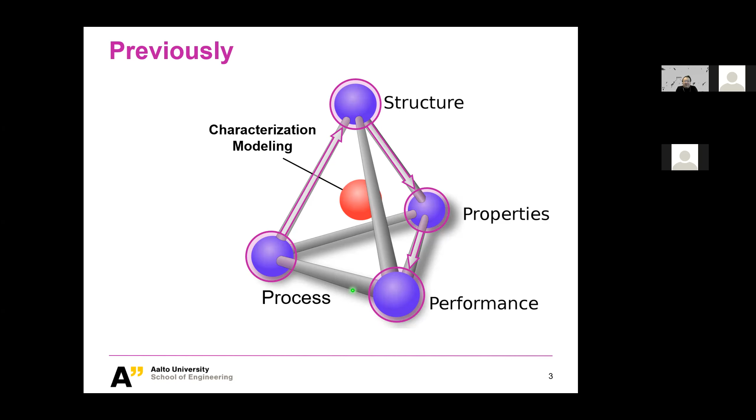But we also want to do something. After we know why, we want to produce things that behave the way we want, right? So that is the process. So process is the key actually for material engineering. And basically, this is the functionality part about material science engineering.

Before we go to processes in detail, we are not really touching the core or the technologies about processes this week, but we need to prepare you. We're going to prepare you in three topics. The first one is about diffusion, the second one is about phase diagram, and the last one is about phase transformation. Before we dive into diffusion, I would like to give you a reason why we're doing this.

Let me see if we got, all right, cool. We got most of the guys here, awesome.

Anyway, let me ask you: if we want to produce something, so we said the process in the end is about producing something. If you think about the engineering materials in our daily life, not a wooden chair or a wooden desk, these are natural materials, let's say we consider engineering materials in terms of metals. Imagine your kitchenware, for example, a knife.

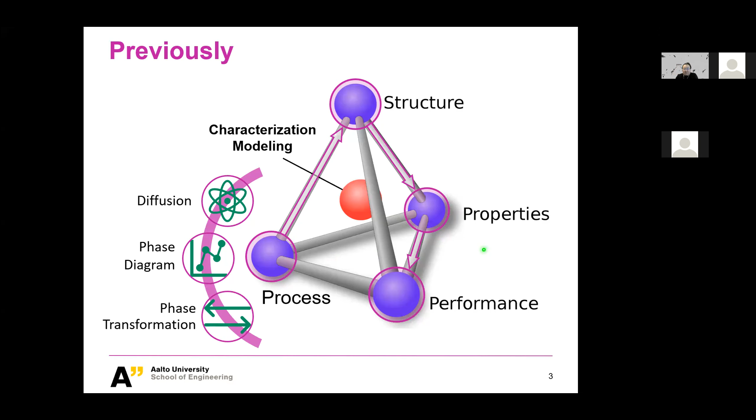So that is the reason we need to learn all these three items, diffusion, phase diagram, and phase transformation, because there is already a phase transformation if we speak about just liquid and solid. But the phase transformation we're speaking about in today's lecture is much more complicated than just from liquid to solid. All right, I think that gives you an idea what we're doing today. Let's dive into them one by one.

So first we start with diffusion. Why are we starting with diffusion? Because diffusion is the basis of all these phase transformations. So a small introduction about diffusion. First, we would like to ask you, what is diffusion? Think about it. Maybe it's a very easy or common phenomenon you're seeing every day, like this picture here.

When you have a coffee, if you are not a black coffee lover, you put some sugar or milk into the coffee. You don't want the sugar or milk just to stay there, right? You want the sugar to diffuse into your coffee. That is the kind of process, right? But we will give you a proper definition, and then you understand what diffusion is really about.

And second, we will tell you what is the mechanism of diffusion. So that is rather knowledge giving. We will tell you the mechanism, but we will not give you a mathematical derivation of the mechanism, because diffusion is a process very much related to thermodynamics. And as far as I know, most of you don't have the knowledge about thermodynamics yet.

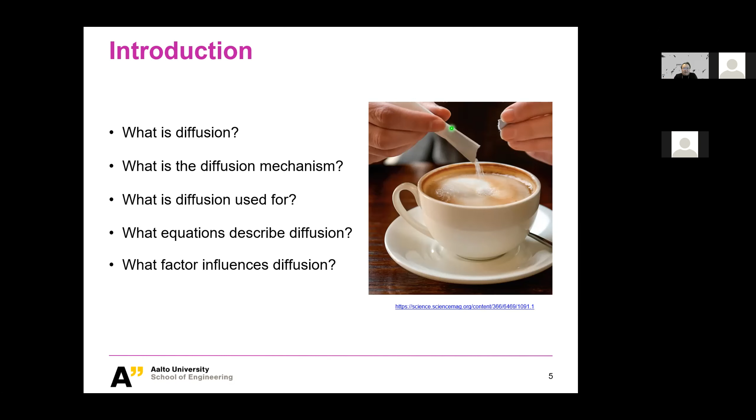Relate to, again, this phenomenon when you want to dissolve your sugar into your coffee. So when the coffee is hot, it's somewhat easier to diffuse, right? When you have a cold coffee, you probably find difficulty. The sugar will just stay as sugar. They don't dissolve. This is already getting to the second part of our lecture today. We will keep that in mind and get back to it.

So the first learning objective is, after the course, you will be able to name and describe 2 atomic mechanisms of diffusion. That's already a keyword: atomic. The second one is you're able to distinguish between steady state and non-steady state diffusion. And third, you will be able to write Fick's first and second law in equation form, define all the parameters and know their applicability. Don't worry, you will learn all these laws.

The fourth one is you're able to write a solution to Fick's second law. You will understand why, because Fick's second law is not a normal equation. It is a differential equation. That's why you will have a solution equation to Fick's second law for a certain condition, the semi-infinite solid. You'll be able to write the solution and understand all the parameters.

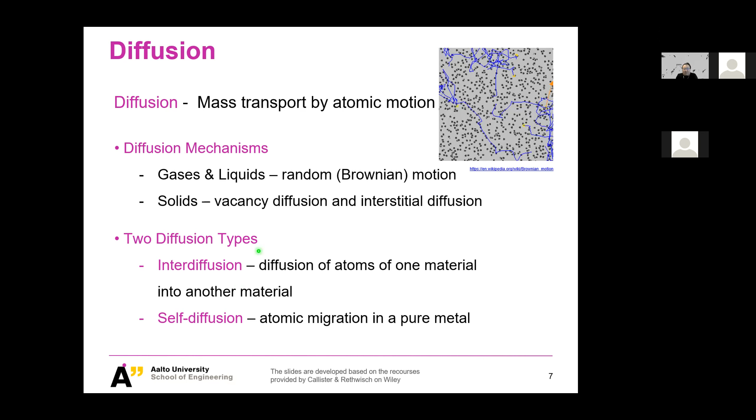If we speak about diffusion in solids, actually this applies to liquids as well, but today we're going to speak about solids, because you learn liquids and gases in high school. There are two types of diffusion in solids. The first one is interdiffusion, meaning the atoms of one material are diffusing into another one. You will see why we are talking about interdiffusion. And self-diffusion is where the atoms are migrating in a pure metal, just moving around in its pure metal.

Let's talk first about interdiffusion. It's simple, like mixing metal A and metal B. Metal A is on the left-hand side and metal B on the right-hand side. For example, copper and zinc, or copper and silver. We have lots of mixtures of these metals. If you put pure atoms on the left and pure atoms on the right, they will start diffusing, right? They will not stay as they are, just as your sugar meets your coffee. They will diffuse into each other.

The driving force for that is completely thermodynamics, the second law of thermodynamics, because the whole world tends toward chaos, and this is not chaos at all. That's why they mix. You will learn the motivation and also an equation to describe it, mainly related to entropy.

After certain diffusion, we characterize things via concentration. If there is no diffusion, the concentration of A on the left-hand side is 100%, and of B on the right-hand side is 100%. But due to thermodynamics, the atoms mix, and the concentration changes from 100% to a finite number for atom A, and the same for atom B. This gives you the driving force for interdiffusion, which is related to the gradient of concentration.

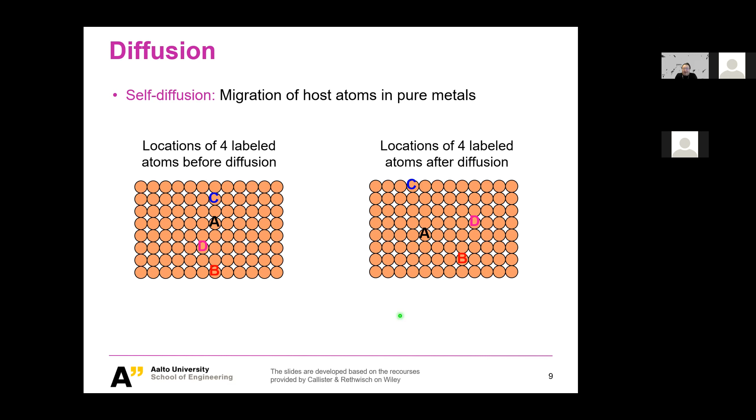All right. So this is the second type of diffusion, self-diffusion. And you were probably imagining that A and B are just changing places, like magic. So are they switching places or what? So now I'm telling you why this is happening, why the A atoms could go to various places. And the mechanism for that is vacancy diffusion.

Let me see. Arad. Oh, Arad is just gone. I was looking at one name. Okay. Let me try to pick up some other people, because I remember some of you are very active, which is excellent. Let me try to know also some others that I don't meet so often. For example, Hu. This is a complicated name. H-U-Y. How do you pronounce your name? Is it Hu? It's Hui. Hui. Oh, sorry, Hui. Yes.

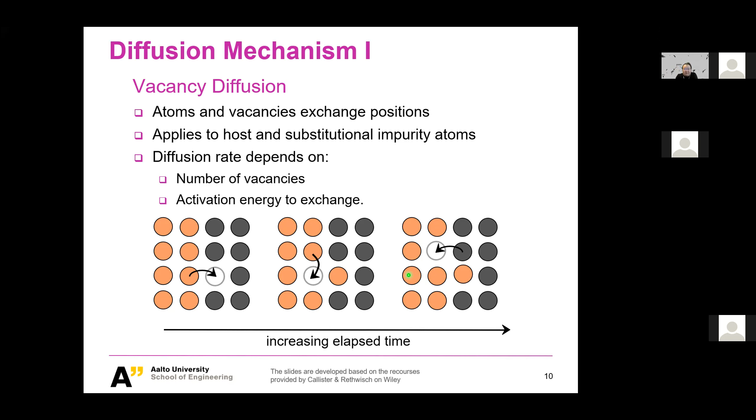And the second mechanism is related to the second kind of point defects, that is the interstitial diffusion. This is related to the interstitial defects. Basically, that means we have small atoms, so we're not mixing copper and zinc, because copper and zinc, or copper and silver, have very similar atom sizes.

If we're mixing, let's say, copper with carbon, since carbon is very small, or copper with hydrogen, the smallest atom, the hydrogen will not be able to replace the lattice positions of your copper. Basically, the carbon or hydrogen will be diffusing into the interstitial places, like here or there, and they're just moving freely.

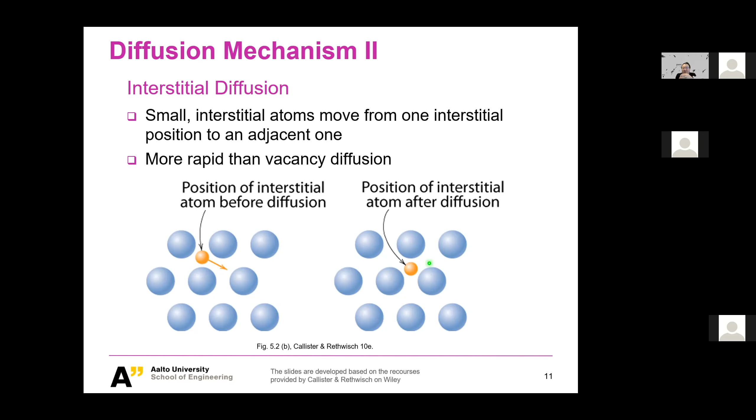So you could already imagine for this kind of diffusion, the speed is much faster, right? Because you have basically, not unlimited, but at least an equivalent number of interstitial positions as your number of atoms.

All right, those are the two types of mechanism, and we could tell you what the application is. What could we use diffusion for? This is an example I already told you during the fatigue part. Maybe you don't remember. It is one way to improve your fatigue life. We said for fatigue life, we always want to protect our surfaces and introduce certain compressive stresses at our surfaces.

And one way is so-called case hardening. This is a typical procedure when you produce gears. When your gears are produced from a certain steel, you put them into an oven containing carbon gas. Then the carbon atoms basically diffuse into the surface of your steel, because this diffusion of carbon follows the interstitial diffusion way, right?

And they create basically two functions. The first one is something you remember. Because of the diffusion of these carbon atoms, you're producing compressive stresses in your original item, because you're pushing something into it, right? And this is already creating the so-called compressive stresses.

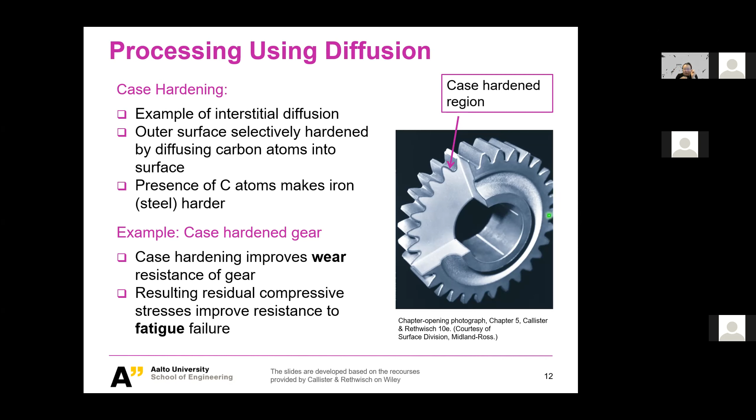And the second point, which you will learn next week: because of this carbon, you're creating a certain solution. I'm already giving you the term solution; we will define what a solution is. You're creating a solution that is way stronger than the initial iron or the initial steel you produced. That increases the hardness of your steel, which is also good for wear resistance. So, two purposes of this kind of diffusion.

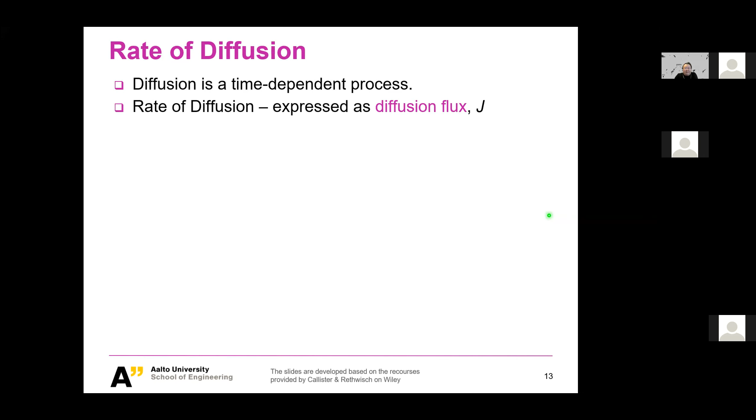All right, that was enough about definition, mechanism and application. Now let's move to some quantitative measures of diffusion. The first thing is the rate of diffusion. As you know, diffusion is a time-dependent process, either vacancy diffusion or interstitial diffusion. How do we measure diffusion? There is one concept called flux, diffusion flux, which is defined as J.

I'm not sure if you have learned anything about flux. If this is the first time you meet flux, just imagine it's a definition about, let's say, speed. Speed is about one item moving from one place to another. So it's the displacement over time, or d displacement over dt. That is speed, and we're speaking about only one item.

But for diffusion, we're not speaking about one item. The speed of one atom does not make sense. It is the speed of a group of items, basically your group of atoms, A or B. For this case, we need to define not just the dt, we need to define an area, a certain area through which these atoms are moving.

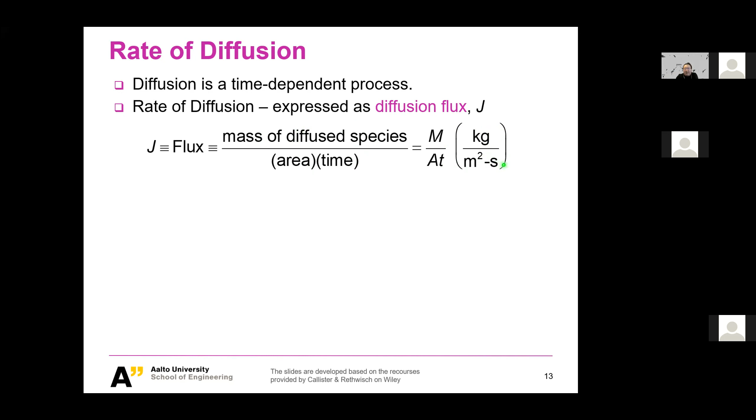From one place to another. So that's why we're going to put an area here. So this is a flux, the definition of flux. We will also learn about the heat flux later on. The philosophy is exactly the same. It's a certain time and a certain area. So you can see this is the unit of the flux: kilogram over meter squared and over time, a second.

And how do we measure it? This is also easy. If you have experiments to do and you want to measure a diffusion rate in terms of diffusion flux, you can put a small sheet or membrane, and you will be able to measure the diffused mass from one place to another, and then you can use the area and dm over dt. Basically, you get your diffusion flux.

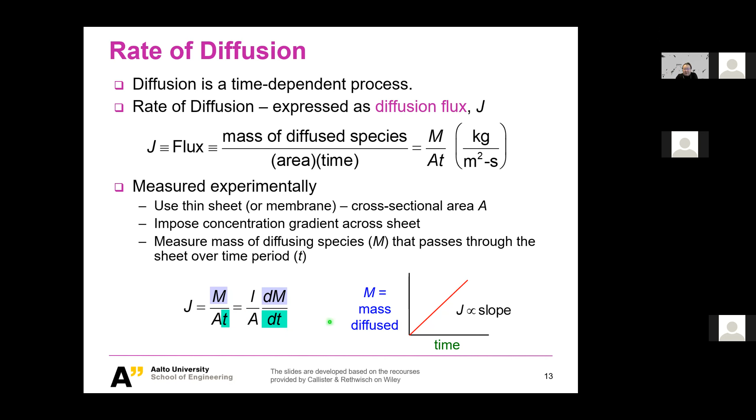So this is pretty simple, and the rest is getting harder and harder. But the requirement for you is not that high. I think you will be able to understand it. You probably won't be able to derive any of this, but you will be able to understand the equations. That's the most important criterion for now for you.

The first thing we try to understand about diffusion is simple. When you mix A and B, you want to know what the final concentration will be. Initially you have 100% of A, 100% of B. So you have some sugar and you have your coffee. You want to mix your sugar into the coffee, and finally you could calculate the concentration of your coffee sugar solution. That is easy because finally we reach equilibrium. All my sugar will diffuse into the coffee and I can calculate.

But if I ask you at a certain time, at a certain position, when your sugar is not fully dissolved into your coffee, can you tell me the equation to describe the concentration of your sugar at that time and position? That is basically what these two laws from Mr. Fick are trying to tell us.

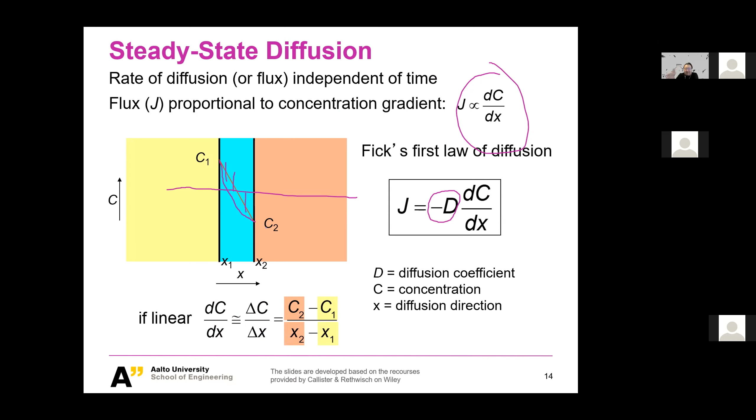And if we just make it simple, if the diffusion flux profile is like a line, as you can see here, you could even approximate this equation: dc over dx is basically delta c over delta x. Basically at each position of this line, they're equal, right? Because it's a linear profile. That's steady state diffusion. And we spoke about steady state.

Then there's non-steady state diffusion. It basically tells you the flux will be dependent on, let's say, position and time, right? And what does that mean? That means your concentration will not be independent of time. For steady state diffusion, the concentration, as I told you, is independent of time. When your concentration is not independent of time, with time your concentration is moving.

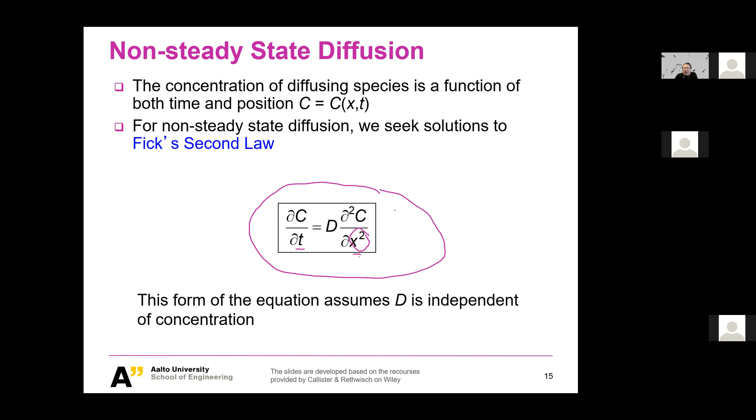As you can see, this is a differential equation, right? This is something you have learned when doing, let's say, finite element methods and so on. If you want to solve a differential equation, what you basically need is a boundary condition, right? So let me give you an example of a boundary condition, a rather simple one. Consider diffusion of copper into a bar of aluminum. So copper and aluminum. And how do we simplify that?

We simplify it so that at the surface of this aluminum bar, the concentration of copper is constant. The concentration here does not change, meaning we have an infinite amount of copper on the left-hand side. And the aluminum bar is also infinite, so it's infinitely long. Let's think about what the diffusion would look like in such a scenario. If we describe that kind of boundary condition in equations, you could probably write the following.

Let's say at time zero, at the beginning of this process, we know at position x equal to 0 the concentration C is equal to C0, right? So here is C0. And for any position of the aluminum bar, it is also C0, right? When we look at the diffusion at a certain time, you see the diffusion profile of copper into your aluminum is changing.

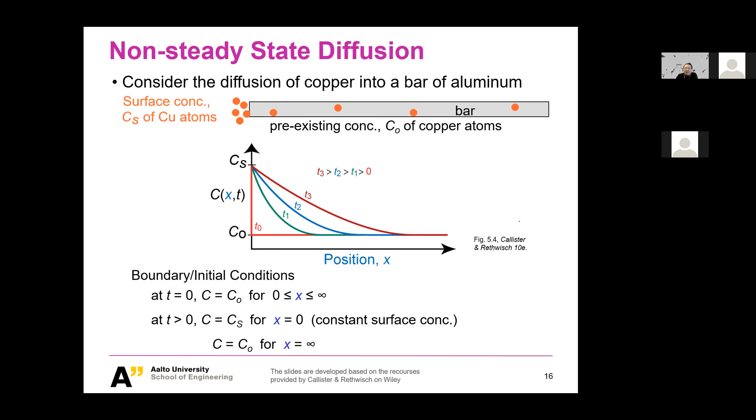So that gives us basically three equations. These are the so-called boundary conditions. With these three boundary conditions and the variables in Fick's second law, you could finally derive an equation to understand your non-steady state diffusion. So this is what the solution of non-steady state diffusion looks like.

You basically could finally derive the concentration at a certain position and a certain time with respect to C0, CS, and position and time. So this is a so-called error function, which looks like this to be more specific. So you don't need to know the details. Basically, this full equation is giving you such a line that you could really calculate at any position, at any given time, what is the concentration. So this is the meaningful part of basically the solution to Fick's second law.

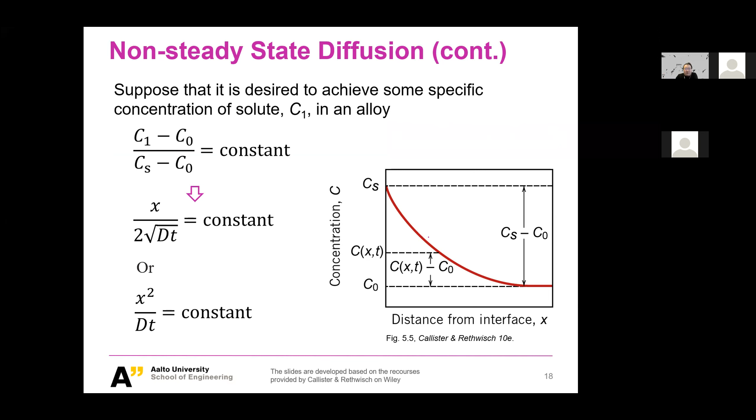All right, so this is how it could be applied. I will not show you details here. You could just read on your own. And the last equation I want to share with you is related to the diffusion coefficient. So we talked about 2 equations about the diffusion flux, and both of these equations concern one quantity. The quantity is the so-called D, the diffusion coefficient. So what is decisive for the diffusion coefficient? This is the equation given here.

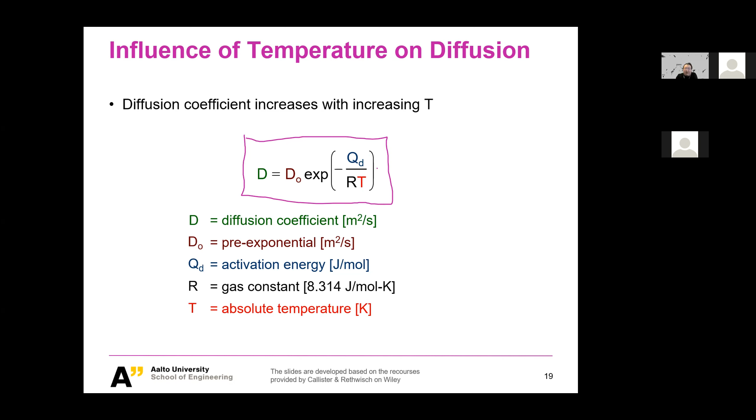So this is the equation which is looking familiar to most of you, maybe, because this is the 3rd time for you to meet it. Maybe you remember the first time when we talked about vacancy. Exactly the same form of equation is deciding the volume fraction of your vacancy, and this is exactly the same deciding the diffusion rate. So you know there's a temperature factor and there's an energy factor. I will not emphasize in detail because you can really correlate it to the vacancy description very well. And you can also describe it in such a way.

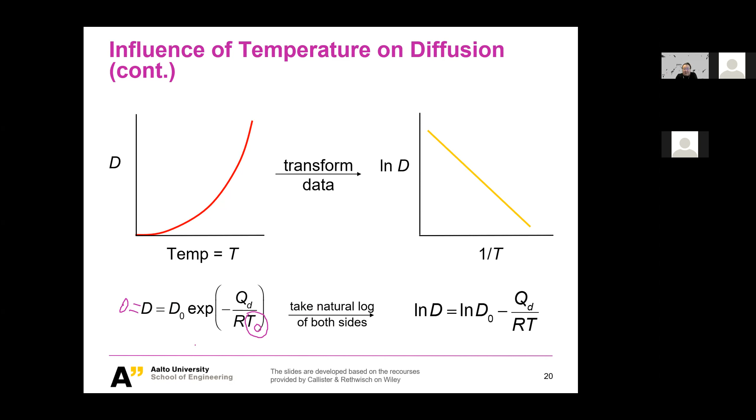What I want to tell you is, maybe you remember when we talked about the vacancy. When the temperature is at absolute 0, so when this term is 0, what does that tell you? It leads D to become 0 as well. This is again confirming that when we have absolute 0 temperature, you will not have vacancy, you will not have diffusion. Even your interstitial positions will be still because all the atoms will be still. This is related to the third law of thermodynamics that you're going to learn most likely in your next semester or so.

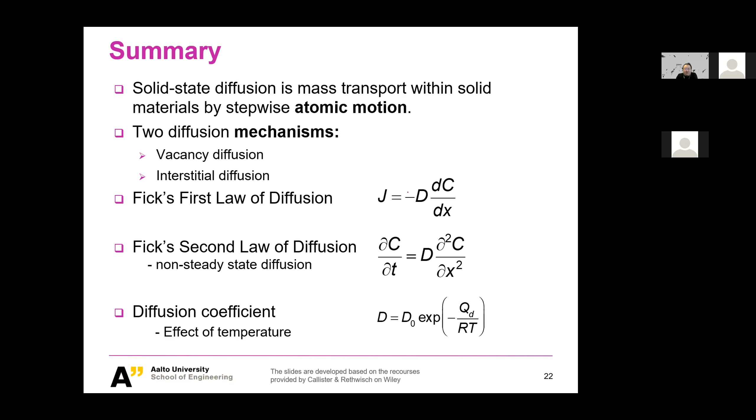All right, a quick summary about diffusion. So basically, we told you what is diffusion and the definition of it. It's related to mass transportation via atomic motion. And we learned basically two diffusion mechanisms, vacancy and interstitial. I think you got a very good understanding of it. And we told you also three equations to describe the diffusion flux and also the diffusion coefficient. All right, I think that is the end of diffusion.

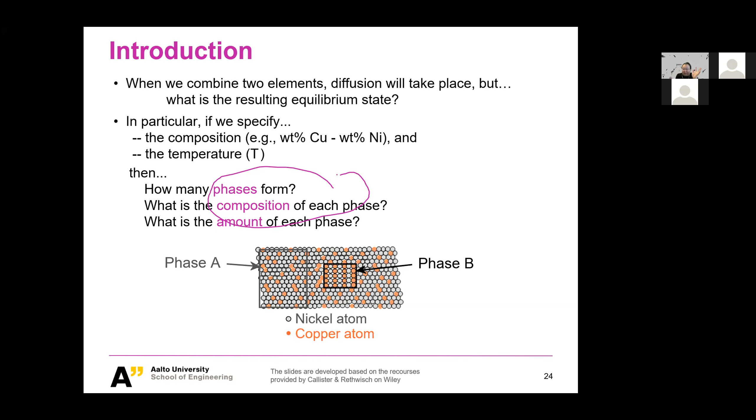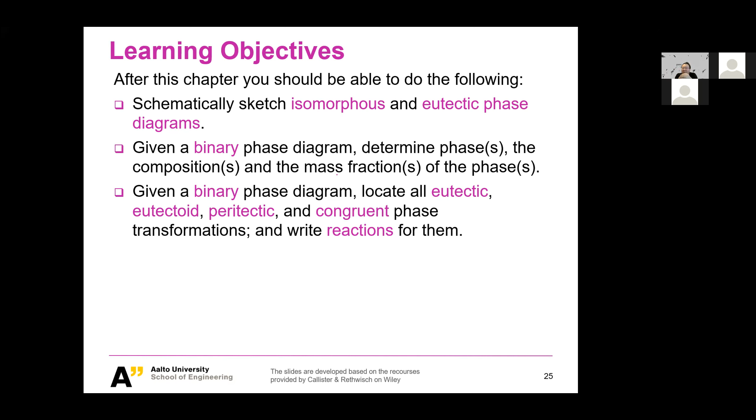And the second point is, given a binary phase diagram, determine the phase composition and mass fraction of each phase, exactly as what I told you. And then you could also have a binary phase diagram which is a little bit more complicated, and you could locate all these eutectic, eutectoid, peritectic, and congruent phases. And you will be able to write the transformation equations or transformation reactions for them.

And the last point is about a very famous phase diagram. It is called the iron carbon phase diagram, or iron carbon alloy. So this is nothing but steel, basically. If you ask a very small kid what a knife is made of, they probably will answer you, this is made of iron, because this is what they learn from high school or preliminary school and so on. But after certain training, you know, no, that's not iron, that is steel.

So what is the difference between iron and steel? Probably you know, steel is an alloy. So a more advanced name for steel is iron carbon alloy. So if you just say, I'm going to use my iron carbon alloy made knife to cook my dinner tonight, then you're becoming a material science engineering expert.

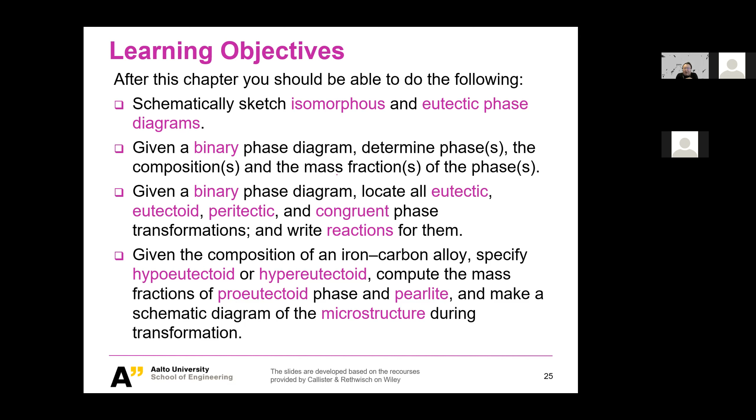And for this diagram, you're going to really learn it in detail, and you will be able to specify the hypoeutectoid and hypereutectoid points, and you'll be able to calculate the mass fraction of proeutectoid phase and pearlite, and finally make a microstructure prediction during the phase transformation. All right, that is basically all about it. And now let's just move slide by slide.

First, I would like to give you the simplest phase diagram, which is called a unary phase diagram. So basically, we're talking about just one component. Here the component is water. We know water changes its phases from, let's say, solid ice to liquid water, and finally vapor. And the changes just happen with respect to temperature. Everybody is familiar with 0 and 100 degrees C, and that is the phase changing point for water. And we're actually speaking about 1 atm, because this is our ambient pressure.

But you probably should know, the temperature for the phase transformation of water or ice or vapor is not constant, right? When you just have a high pressure, maybe you know the high pressure cooker.

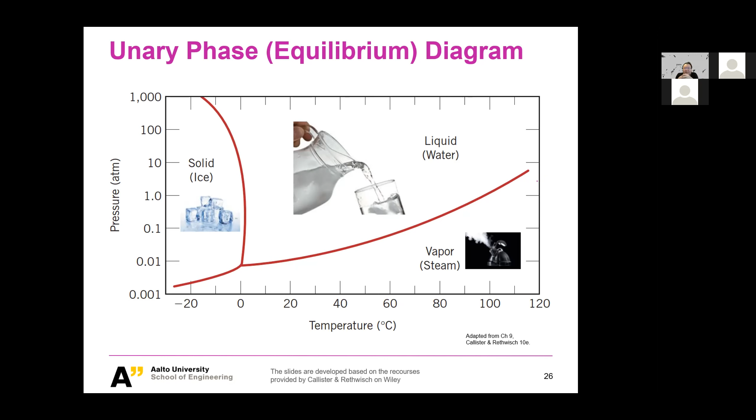So basically, that could give you a very fast way to cook your food, because you can get your water temperature or your cooker temperature higher than 100 degrees C. That is the temperature we could only reach with the normal pressure. When you have a higher pressure, you could get 120 or even 200. That will make your food cook really fast. And that is the unary phase diagram. So you know something about that.

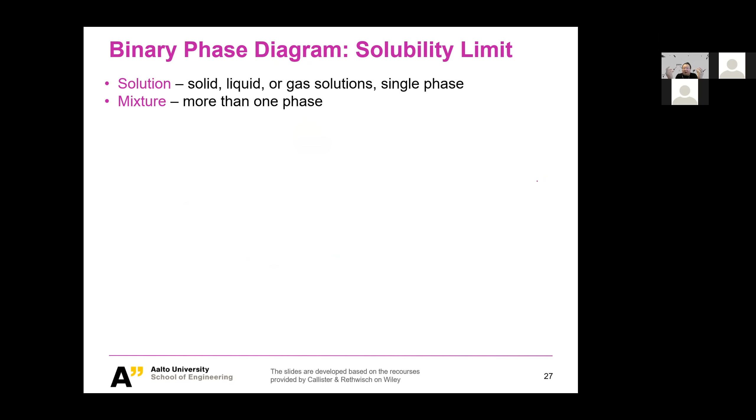And now we're going to finally speak about the binary phase diagram. So what is a binary phase diagram? Meaning we're talking about two things, A and B. So like sugar and coffee, or copper and zinc. So this is the main topic we're going to discuss for our case. So there are some definitions, but first let's talk about this diagram here.

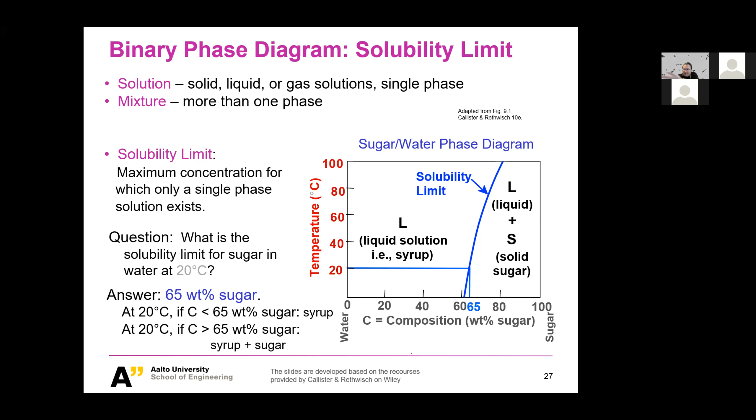So now you know, when I want to have the maximum sugar possible, I shouldn't put the weight of my sugar at more than 65% of the water. Here it's not coffee, unfortunately, it's water. But you say, oh, I just love sugar, I want more. So how do you do it? Then we just increase temperature, right? When you have a higher temperature of your coffee, you will be able to dissolve more sugar into it. So this is already a good use of a phase diagram. We're still speaking about a very simple case, sugar and water.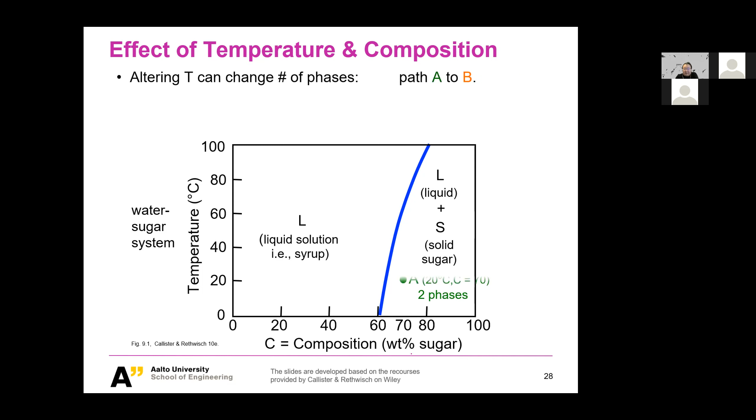Now we're going to speak about a more complicated case. So this is exactly what I already told you, and here I'm trying to give you some animation. A more complicated case is when we're speaking about two solids, so zinc and copper, or aluminum and copper. And here we're first giving you a proper definition of components. Components are basically the elements that we're trying to mix. So here we're talking about zinc, aluminum, and copper.

And finally, I'm giving you a proper definition of phase. The definition of phase is very similar to the definition of failure, maybe you still remember. We don't define it from a structural or in-depth level; we're defining it from its exterior behavior. So a phase is defined as a region, a volume, an area of your material that has equivalent physical and chemical properties. So when we speak about one phase, this region of material behaves uniformly the same in terms of its physical or chemical properties.

I think everybody has it in mind. This is just a proper definition for you to think about: is this one phase or two phases? You should think about whether they're behaving exactly the same uniformly. If yes, then they're one phase. If not, there are two phases.

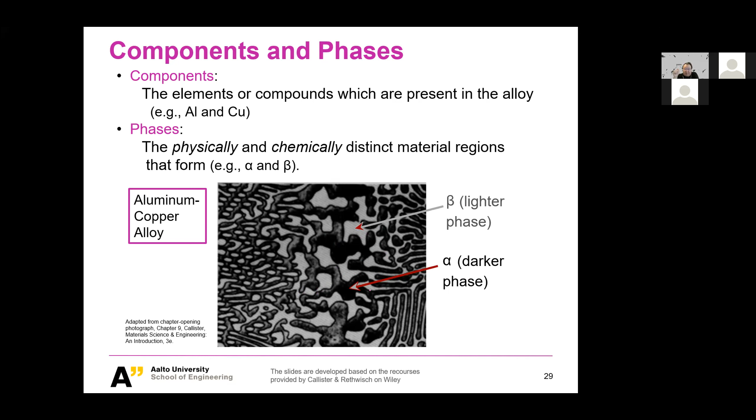So here I'm already giving you two phases of this aluminum copper alloy. You see, obviously, already optically from the micrograph, we have two phases: the beta phase, the lighter one, and the alpha phase, the darker one. We will right away talk about the phase diagram of aluminum and copper, and you will know what alpha and beta are. There's just one thing. We talked about solubility of sugar in water or sugar in coffee. Actually, there's also solubility when we try to mix solids.

What is the solubility? What is defining the solubility of solids? So first, if we talk about nickel and copper, the solid solubility is decided by their crystal structure, their electronegativity, and also the radius of the atom. So if we have very similar composition or structures of these two components, nickel and copper can basically dissolve each other 100%.

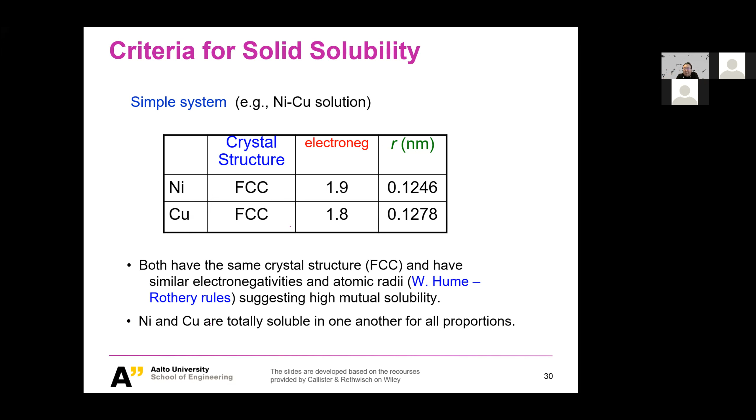So you will always be able to form a solid solution for nickel and copper. So either 100% nickel or 100% copper, or any combination in between. So this is so-called totally soluble. And this is very rare, to be honest. It can only happen for a few atoms. We will show you right away.

But as I told you, why we were learning diffusion, phase diagrams, phase transformation: the reason is completely related to what we're going to learn about processes. Because when you want to make your engineering materials, as we discussed at the very beginning, you need to do a very necessary operation, which is so-called solidification. This step cannot be avoided. And you want to know what is happening to your material during solidification, or even more generally, during the decrease of temperature. Many things are happening, to be honest. This is something I have to tell you.

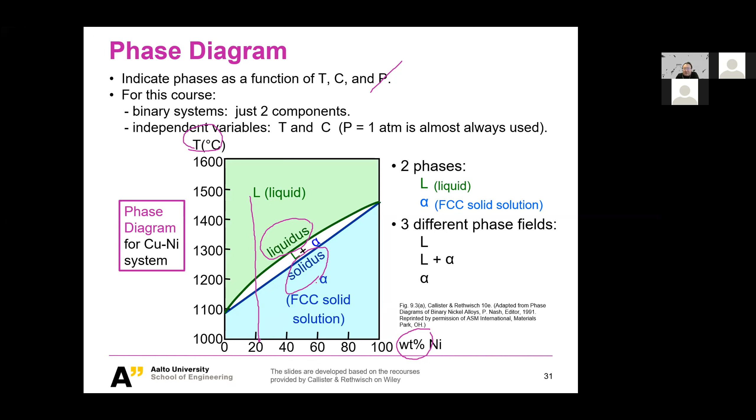And if you recall the sugar coffee situation, we were actually displaying only the liquid and the coffee plus sugar part, so the solid plus liquid. And actually, if you decrease temperature, you will have 100% solid. Just to give you 2 definitions: the line distinguishing the completely liquid phase from a mixture is called the liquidus line. And the line distinguishing the completely solid phase from a mixture is called the solidus line. This is important, so keep it in mind.

And with this kind of knowledge learned, you would be able to understand this diagram better. So now I show you some application of this diagram. This diagram is a so-called isomorphous diagram, meaning we could have complete solubility of one component in another in a solid phase. Yeah, this is the important part. In a solid phase, we could have completely one phase. This is the so-called isomorphous binary phase diagram.

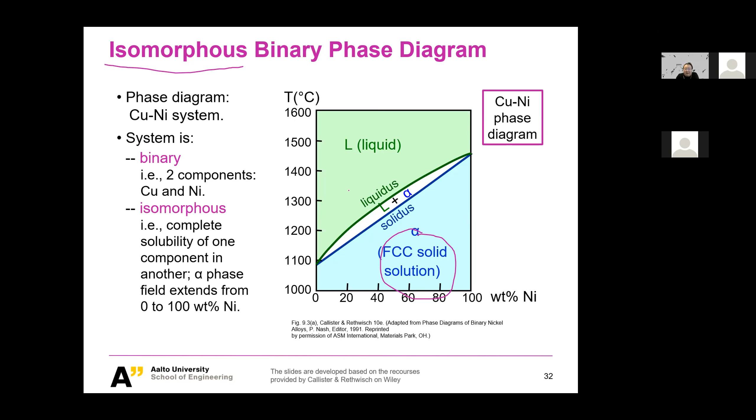And right away, we're going to move to a use of this phase diagram. So we've said we want to give you this tool to be able to determine something. And here I'm going to show you 3 kinds of application of the phase diagram. The first application of the phase diagram is to determine what phases are present. This is actually a very, very simple thing. I will just give you some examples.

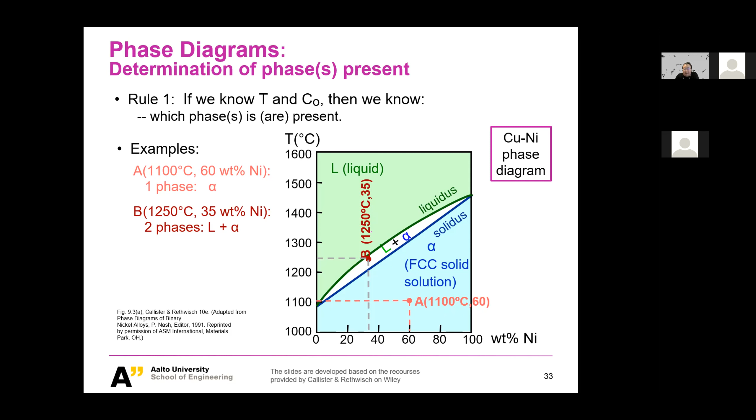So let me ask you. When we have a certain temperature and a certain composition of copper and nickel, you want to know what should be the phase over there. And from this diagram, you could see, okay, if it's 1100 degrees C and 60% of nickel, it is solid solution. And if it's 1250 degrees C and 35% of nickel, it's a mixture. And of course, I don't have the third example, but if it's higher, you have a liquid.

That was easy. The second application of the phase diagram is to determine the phase composition. This is especially useful when you have a mixture condition. When we have 35% of nickel and a high temperature, that is completely liquid. When it's lower temperature, it's solid. But when we have a mixture, at about 1250 degrees C, we have both alpha and liquid present. And we want to know what kind of liquid solution we have and what kind of solid solution we have.

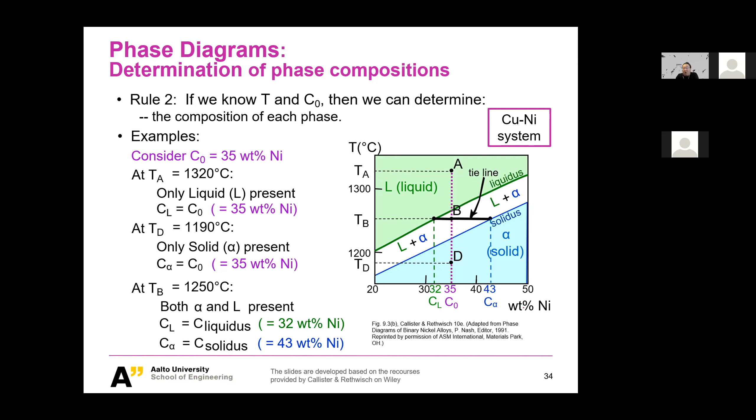So with this diagram, you could just use a so-called tie line. Basically, you locate this composition and this temperature, you make a line to touch your liquidus line and your solidus line, then you know exactly. The mixture at this temperature and composition is composed of a liquid solution with 32% of nickel and a solid solution of 43% of nickel. So this is the point. And you can use it to determine the mixture contains these 2 solutions.

And the third one is more quantitative, because I have a combination of 2 solutions, the liquid and solid, and I want to know how much is the solid solution and how much is liquid solution. This is the third application of the phase diagram, the so-called lever rule. Actually, this is pretty simple for you to imagine, because basically we are having these 2,

Oh, just 1 second, guys, excuse me. All right, so I'm back.

For these two kinds of solutions, we're reaching the same balance, which is we're going to finally contain, let's say, 35% of nickel in the whole solution. That's why how these two solutions should be composed and what is their fraction should follow the so-called lever rule. This equation: the amount of alpha, the solid phase, times this length should be equal to the amount of liquid solution times this distance, right? And we know here should be 35%.

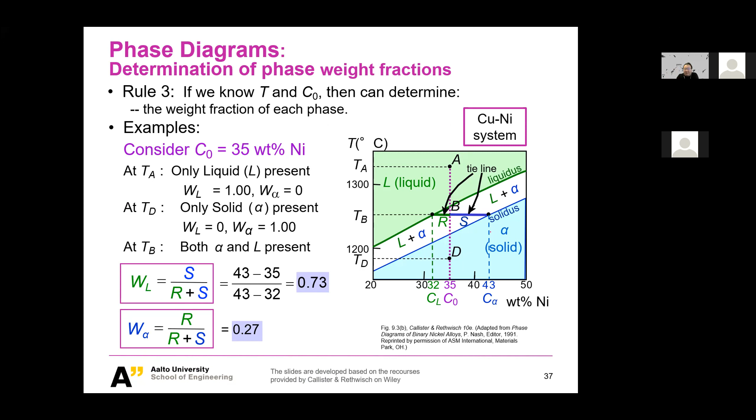So here finally we get 73% of the liquid and 27% of the solid. All right. And now I want to give you a little bit of the process of it. So we know already the three most important applications. We said the phase diagram is basically to let you know how the microstructure is produced, because our materials always go from high temperature to low temperature.

Here I'm already giving you a little sketch of it. So let's say we have a certain liquid solution of copper and nickel alloy. No matter how it's produced, you get such a situation over there. And now you finally want to produce your tool, a tool made of nickel and copper. So you start from the liquid phase and you try to solidify it. You try to decrease your temperature.

And what is happening in your liquid solution is that you have 35% of nickel liquid solution. And when you just hit the liquidus line, you start to get a mixture. So the mixture is composed of a certain amount of liquid solution. Let's say we just hit the position of the liquidus line. You will have the 35% of your liquid solution plus a very small amount of your solid. So this is 46% of nickel.

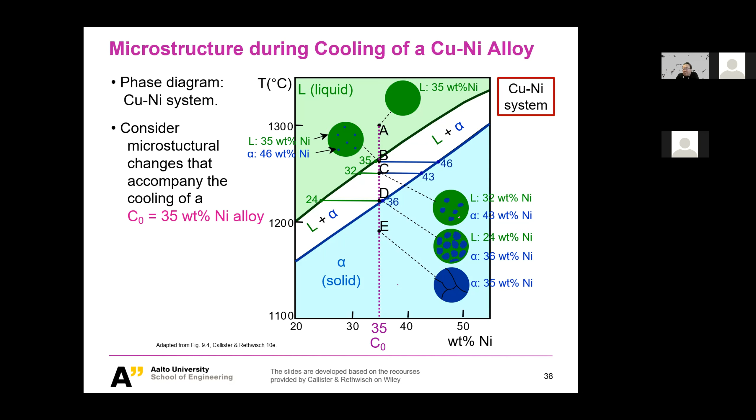And if you decrease your temperature further, you become 100% solid phase, and it's uniform, at 35% of nickel. All right. So I hope you could understand this phase diagram, because this is the simplest. Try to rehearse in your mind what the microstructure is doing. The mechanism that makes this change happen is basically driven by diffusion. You probably already remember that. And that is an equilibrium structure, so we have the uniform case from one to the other.

But very often we don't have equilibrium. We always have fast cooling, so we don't wait for our structure to reach equilibrium. And that's why, when you have a small nucleus, you have a very high percent of nickel in it. And when your solid phase grows bigger and bigger, the nickel concentration becomes less and less. And you can imagine when you finally reach 100% solid, this outer layer will contain less than 35% nickel, because if it's uniform, it's 35%.

But if you have this kind of layered structure, because at the center you have a higher concentration than the outer layer, your outer layer will have to be less than 35%. Okay, so that situation is actually closer to reality. And the completely uniform case is really ideal.